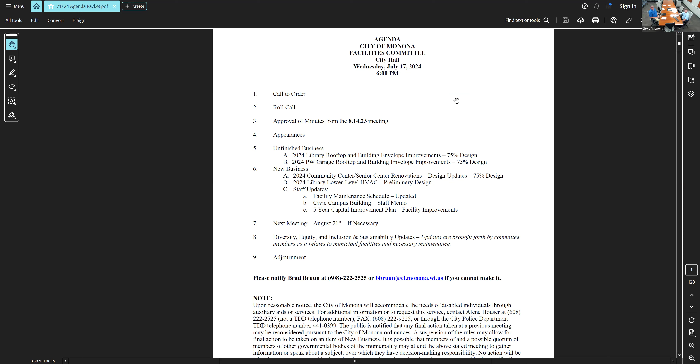And then is there any additions, deletions, or corrections that anybody noted? Nope. All right, hearing none, all those in favor say aye. Aye. Opposed? All right, minutes have been approved. Brad, is there anybody in the room that's for appearances? Not tonight. All right, and do you see anybody online? No, we do not have anybody waiting in the waiting room or otherwise. Perfect.

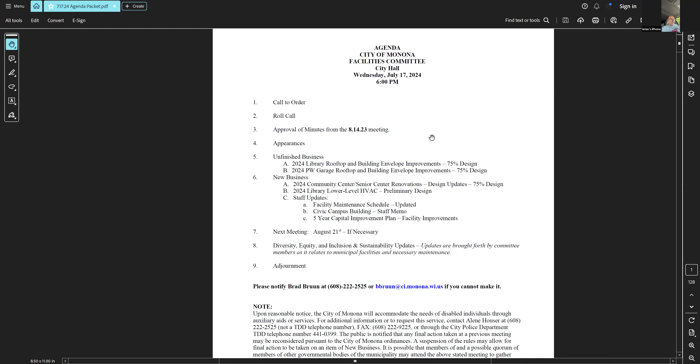That section can be closed, then we can go on to 5A, which is unfinished business. This is regarding the 2024 library rooftop and building envelope improvements, 75% design. And Brad, if you want to just kick us off.

So we'll start with the estimated costs. Can you guys see the screen that I'm sharing? Yes, okay, all right. The Public Works Garage is listed first. Not a cheap project, but it's a fairly large facility if you guys are familiar with that garage. And there's a fairly good amount of damage to things like siding, gutters, etc., especially the insulation.

Adam, do you anticipate us having to remove a fairly significant portion of the insulation on this project? So what we figured in with this cost is just kind of spot replacement of the insulation on the other side of the current roof deck. Unless something has changed, because it's been a while since I've been there, that a lot more has been compromised, then that was our intention moving forward, is to continue with that spot replacement. I mean, it's basically going off of my visual assessments when you and I walked around there.

Probably a year and a half, two years ago, yeah, almost two. So I haven't seen any other damage per se.

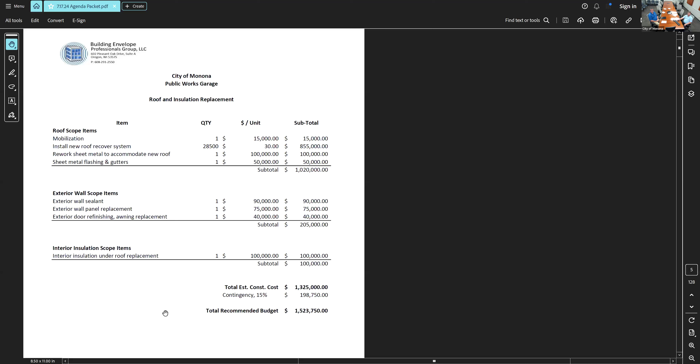Any questions on the cost estimation here? Pretty typical contingency, 15%. I guess my question would be, what did you figure for a percentage of insulation replacement? You're calling for spot replacement, but is there anything implied or written?

So that actual quantity is not in the documents yet, but will be. Going off of visual observations, I would say it was roughly 10 to 15%, somewhere in that neighborhood, of the total amount, whether it was on the underside of the roof or wall insulation.

That's a good point though, Brendan. We should probably list the estimation of the amount in the project manual. Yeah, I think it just covers both sides.

And Brad, where are we at with this estimated cost with what we had set aside? Well, we had in the original 5-year capital plan, I think like 800,000 for this rooftop. And then with price increases and delays in the project of a year or two, it's gone up, and the amount of damage that we've assessed is increased as well. So the scope increased slightly, and then obviously the price crept with inflation.

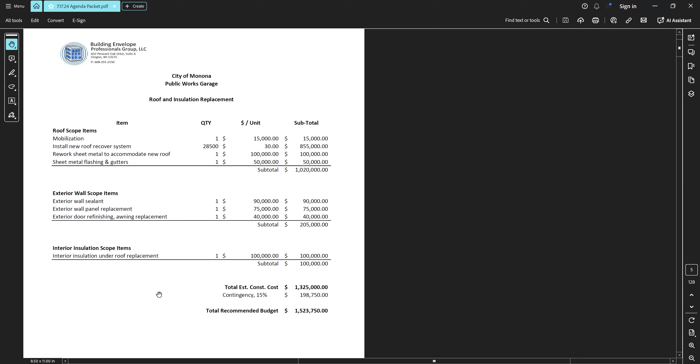Any other questions on the general scope of the project? No, thank you, sorry I interjected. That's fine, absolutely, that's what we're here for. Yeah, that's perfect. You want to move on to the library? Yeah.

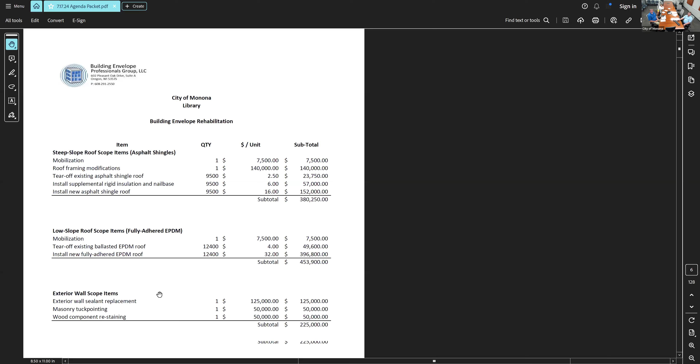All right, library estimated cost, 1.2. This particular rooftop is an interesting mix. The original facility is from 1970-ish, I think. It's a sloped roof with several angles, like 3 or 4 hexagons all put together. Then it tied into a 2001 addition.

That's a flat roof. Is it an adhered membrane? Oh, it's ballasted EPDM. We've been having issues with intermittent leaks, usually once or twice a year, something leaks into the facility, whether from the shingle portion or the flat roof portions.

The goal would be a complete replacement of the roofing materials on both sections, including repairs to different areas where we have a vertical face and the rooftop comes into the vertical face. So there's a skylight, there's all the curbs for the rooftop HVAC units, and where the sloped portion comes into the new addition.

All those areas need to be addressed, and then we'll address any issues with gutters and downspouts. There are a lot of air gaps in that facility - I can't remember what that ceiling tile material is called, tectum. It runs straight from the inside of the facility to the outside, and that's the soffit material outside. So there's a gap at the very top of the walls where the tectum comes through that needs to be sealed back up all the way around the original part of the building.

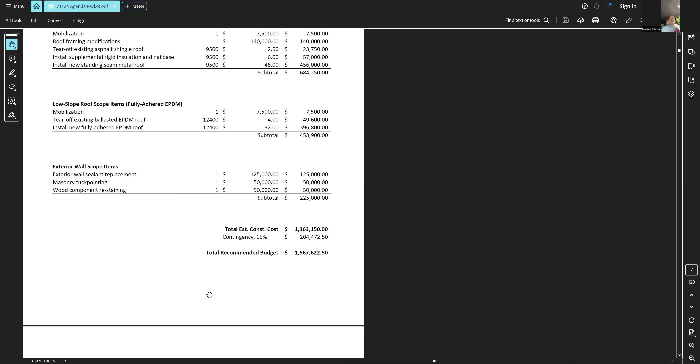Yeah, I would only add that we've been hesitant in the past to put something out to bid that we weren't somewhat committed to, knowing that firms go through a lot of hours and costs to respond to those bids, and we don't want to leave a bad taste in people's mouths so they don't come back for real projects. So that's the balancing act—sometimes we might add something in as an alternate bid, which could be rejected because it's a smaller side project. We'll have to see how things work out in this one.

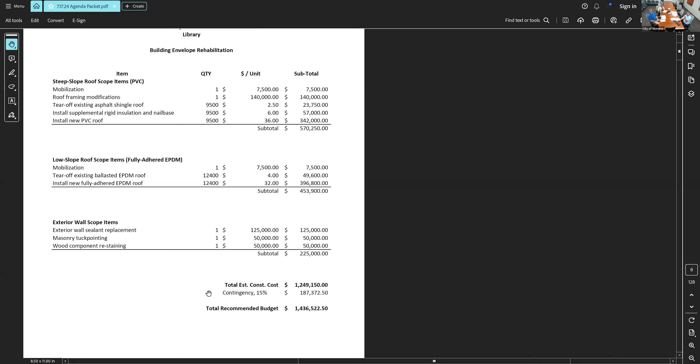So the difference in cost, I forgot that they were in here, I'm sorry. No worries, they're in the packet. I know it's a large packet, 128 pages.

I'm always available if you guys have time to look through any of this and have more questions. Reach out to me—I can get Adam on an email chain and we can go through everything with a fine-tooth comb if you want to.

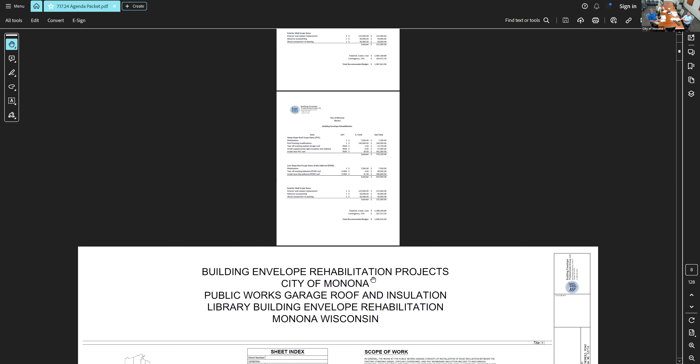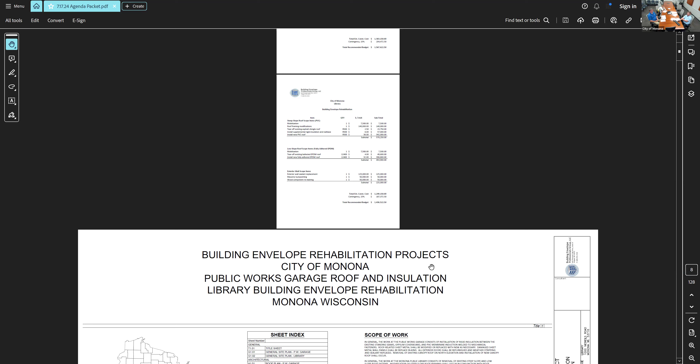Like I said, we're about 90% designed at this point, so we have time. The budget proposals go to the mayor the first week of August. So scope can't necessarily change, but we can definitely put in different items in the spec—language, CYA type language, assurances, limitations, milestones, things like that. So feel free to reach out to me.

I did send the spec manual today, so the spec sheets are in your email inbox. Let me know if you see anything in there you'd flag, like you should probably adjust this, or I'd suggest making some revisions here and there.

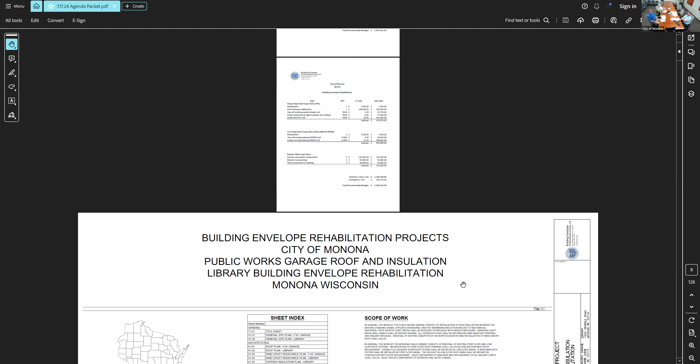Brad, that was that separate email with the 3 attachments, right? Yeah, that's correct, and that's specifically just for the garage roof and the library roof project—that's what we've been discussing here. Okay, perfect, thank you.

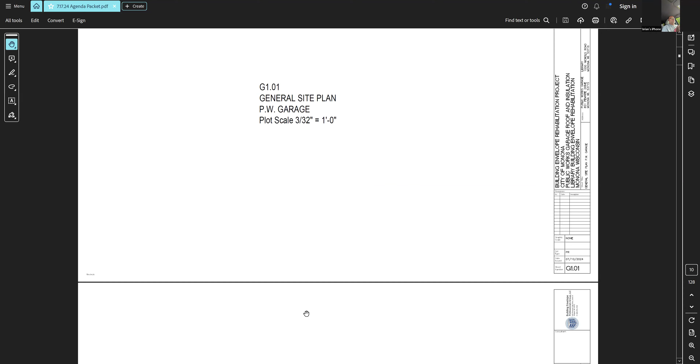I think we can move on to new business, and why don't you start us off with the community center, senior center renovations? Yep, so Adam, you're good to go up here.

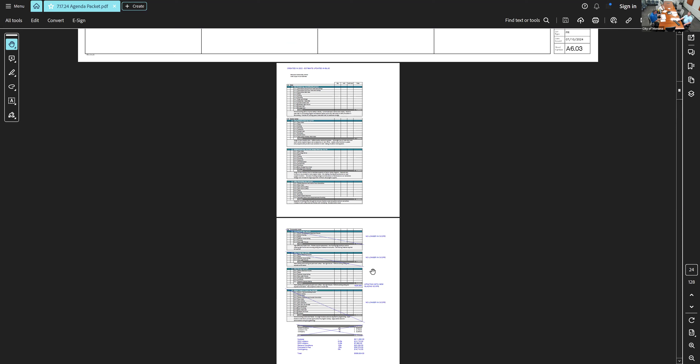Okay, thank you for coming. Yeah, thanks Adam, it was great to have you at the meeting. Yes, thank you, and we'll talk. Thank you very much. Yeah, you too.

All right, so this might look familiar. This was on our agenda in August of last year. The way we structured the bid request last year was to put in like 9 alternates prioritized from A to whatever it was, like H or I. And it was bid out late, and I just have a feeling that contractors looked at it and said, I don't understand, why would I put the effort forward to do this if the only part of the bid that you're going to accept is like the main bid, bid A.

So nobody bid on the project. I wasn't surprised with how late it was put out. Now we're looking at it again, and it is very late in the year again. So I don't necessarily have high hopes for this, but the scope is slightly different.

The idea here is to improve safety, accessibility, and functionality for the actual staff. Our senior center director is in an office that would be about the same size as most people's walk-in closets or smaller. It doesn't have HVAC controls—I don't even think it really has air conditioning in there. It's just a bad situation. The same goes for most of the rest of the facility, especially in the senior center, which is used on a daily basis.

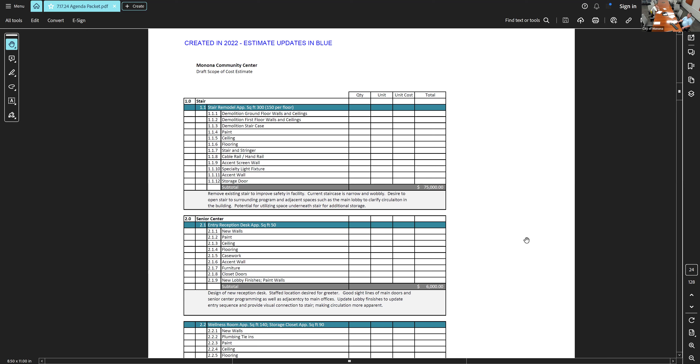So improving that, and creating a wellness room, which is heavily used even though we don't have one right now. It's one of the programs in high demand all the time for seniors. So creating a room with plumbing, to make it a more sanitary condition where you can wash feet, rinse things out, wash your hands, make it more welcoming and relaxing. It's meant to be a spot where you go to get healed and treated. So that's the 2.2 portion.

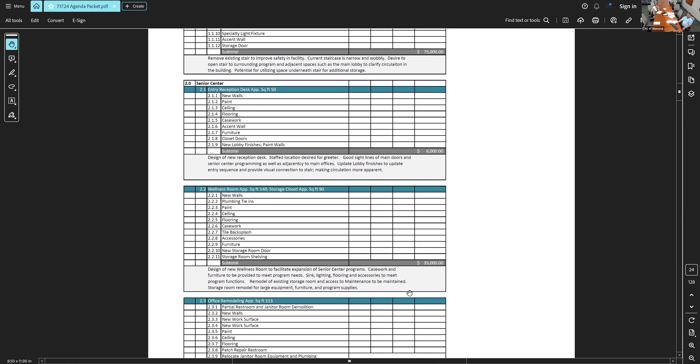And then the office remodels, and these are the items they've removed from the previous plan. The main hall - I'm not sure how much of this is actually going to be in the final bid, because they did just address it with a facelift. Basically, they painted the main hall and did some things, so we'll see how much of this is in there in the final bid.

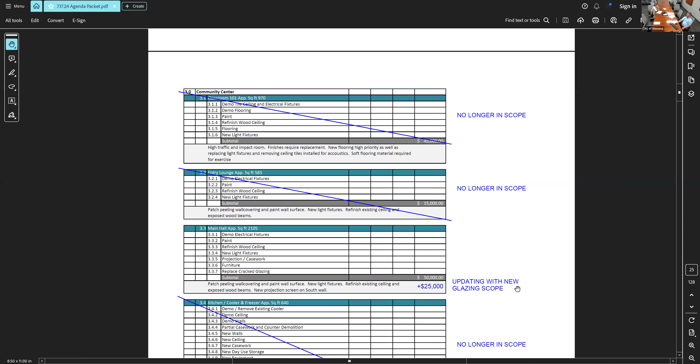But there are some major issues in that room, especially with the wood paneling, and the light fixtures are 300 or 400 watt metal halide fixtures - at least half of them are, and half are LED conversions, but they're these big glass bowls caked in bugs and dust. So it's not a welcoming room, and it's where they have their main events. They used to rent it out for weddings and church and stuff like that, so that needs to be addressed.

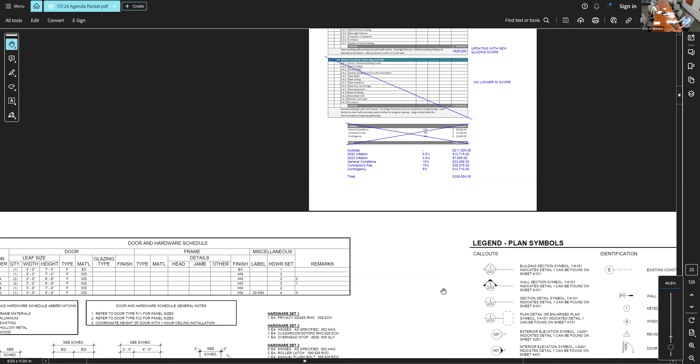Estimated total is right here. The budget is 300,000, so we'll see what we're looking at with bids. The plan set continues on after that. I don't think there's a bid manual in this packet - I don't believe he sent me that, so you just have to go off the notes and the plans, but you can get a general sense of exactly what they are projecting to do with the facility with these renovations.

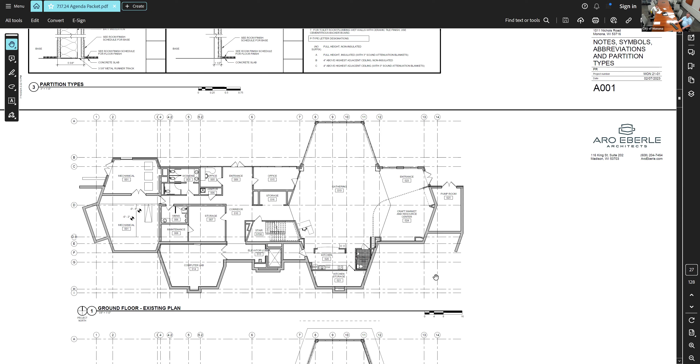All right, thanks Brad. I might have cut out there for a minute - my phone overheated and turned off. So now I have the air conditioner on, hopefully that resolves the issue.

Brad, were all of these drawings in the packet, and these revisions - or did I miss when you mentioned that? Yeah, the drawings are in the packet. This is the packet that I have open, we're just scrolling through it - the one that was attached to the meeting, and the one that I sent out again today, just as a reminder.

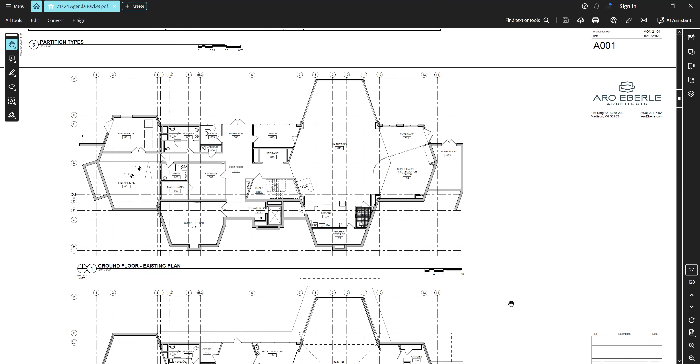Okay, and it looks like it's the same project, just a little bit reduced scope, right? Yeah, that's correct - we're not doing the lounges and the kitchens anymore because we don't have the kids in the facility anymore for the after-school programs. Okay, so we really don't need to touch that stuff at this point. Okay, that makes sense to me.

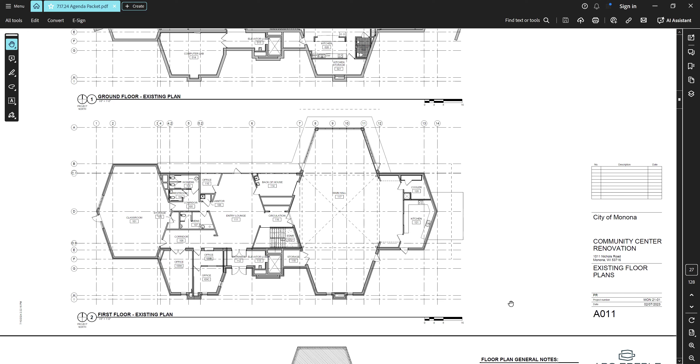Are there questions that others have? At the end of the drawing it does look like there is the bid package with the advertisement to bid and all that. Oh, there is, okay. Good, so there is some HVAC items, obviously, and then there's going to be a significant amount of electrical.

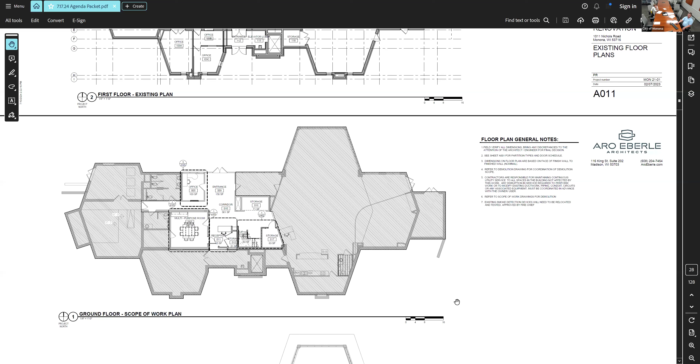Once they start touching the rooms, they have to update to meet electrical code. The spacing with outlets and things like that isn't even close to meeting code as it is. So some of these things add up very quickly, especially on electrical, plumbing, and HVAC, when you're talking about reframing or tearing out floors. Aesthetic stuff isn't as big of an issue, but there's low voltage work that has to happen with this project. So the scope, even though it's a small renovation, it still adds up very quickly.

This building is from 1968, built mostly as though it was a three-season facility. They built the west side of the building with these prefab panels, which have windows in them, and the panels are only about 2 inches thick, which is the amount of insulation in those panels. So what happens in the wintertime is they ice up on the inside with condensation, directly over the top of a lot of the floor registers. Then you get melting and freezing, melting and freezing, and it's just an absolute mess, which isn't part of this project.

We'll talk about that when I show you the facility maintenance schedule I've tried to put together, which will be presented to the mayor. It's probably going to be overwhelming for most of the alders and the mayor as well, so there's a lot that needs to be done, but a lot has been pushed or neglected. We didn't have somebody necessarily in my position over the years trying to corral everything and funnel it so it gets organized and somebody's eyes are on it all the time. Facilities in most municipalities just don't get prioritized if they're not heavily used by the public or aren't a landmark, so to speak.

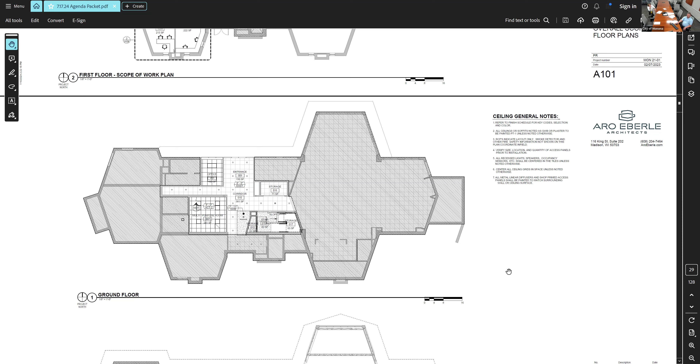Are there any other questions?

And you said some of those items might be taken out because they were already taken on internally. So maybe, you know, that main vestibule, when you come in, the entry space that had a line item like 15K, it'd be really nice to upgrade the lighting in there too and try to have a similar feel as you enter the building for your first impression and to get your bearings. So if there's any way to squeeze some of that into the bid, I think that would be good.

I believe that main lobby, when you walk into the community center on the upper level, those lights are the same as in the event room, and the idea was to change everything out to whatever style they choose. I believe they're doing something along the lines of a hanging light, fully enclosed, like a bar or a circle, but with no gaps, just a panel or glass panel. So all LED, low voltage. Yeah, because making an inviting space and making it function better.

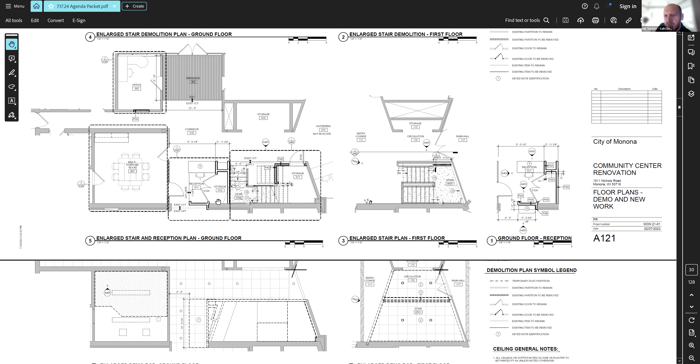And then while you're on that plan, the lower level has a reception desk when you come down the stairs, which has no sight line as you come down. I see it's lined up with that entry to the north that faces the pool. Is that the main entry to the senior center now? Yes. I've never gone in that entry. Yep, so this is the main entrance for the senior center right here. It comes in from that parking lot along the side, and the pool is out here. This is the proposed expansion of that office space, which is not even a third of that right now.

Moving the door, there's a register right here on the wall.

This is like a janitorial closet that doesn't get used very much, so that's what they're expanding into. There's a bunch of HVAC that needs to move into the drop ceiling here. And then this room is currently...

It used to be like the maintenance room for the facility. This is a closet that goes back in here, and it was just being used as storage, general storage. The idea is to make this into something that's more like a meeting room.

They could list it as a multi-purpose room, but something that they can use, that they can put people in so that if they have another event in adjoining rooms or down the hall, it doesn't interrupt them. So if something is noisy or these guys need a quieter space, they can do that.

And then, yeah, the stairwell will be down there, reconstructed and improved with added storage underneath it. And so when you come down, you'd come out and there's this kiosk welcome desk around the corner.

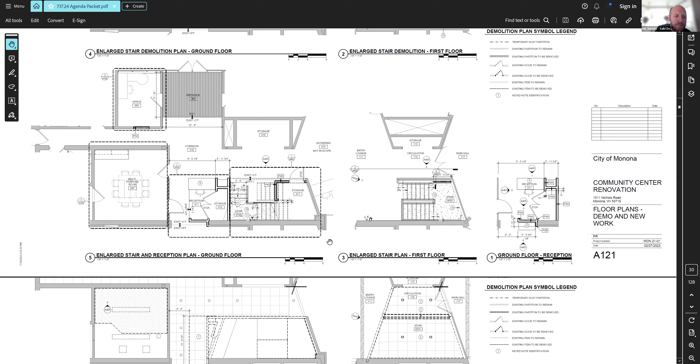Just for that main hall, you mentioned that it's not currently being rented out. Is the plan in the future to be able to rent that out? Honestly, I want to say that's pretty dependent on the referendum.

That is going through—we seriously have a major staffing issue when it comes to maintenance. The only way that we would be able to do it is if the costs of renting it paid for the cleaning and maintenance of the room.

And that's been addressed through the Parks Department, and they've discussed it pretty at length. So if they ever did open it back up, that's what we'd have to do.

The other issue is the security system with the locking mechanisms on all the doors. It doesn't work very well in this facility. We've always had issues with it.

And so to monitor it, to make sure that it closes on a timer and stuff like that for events, so that people aren't in the facility passed out all night or something, like at a wedding—which has happened—that's also an issue. So they need to figure that part out.

Right now it's just to uplift it so that the city can actually use it. We used to have all of our staff appreciation lunches and stuff like that in that space. So the goal would be to use it again, especially for public information meetings.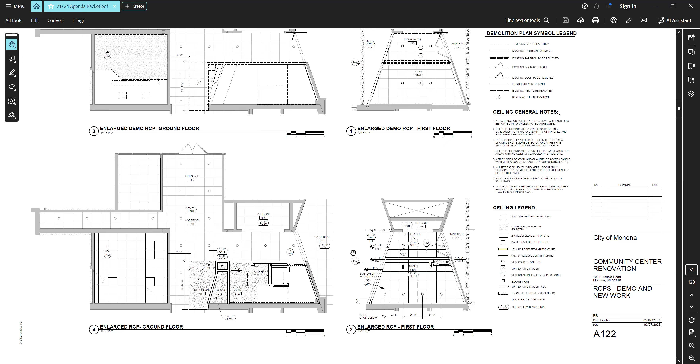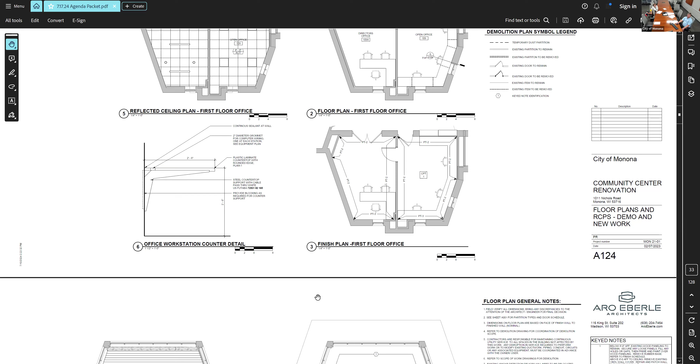Okay, most of the rest of this is your typical plan sheets, flooring, ceiling tiles, director's office, office layout. So again, if you see anything in here that looks odd or needs to be added, just let me know and I can send the feedback to the architect, our parks director, and our senior center director.

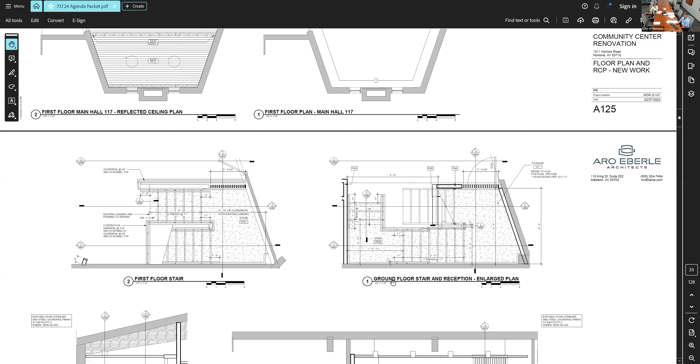So this is what the new stairwell will essentially look like, with the reception next to it on the bottom. So it looks like maybe they're actually moving where you come out of the stairwell, to the backside, which would be interesting.

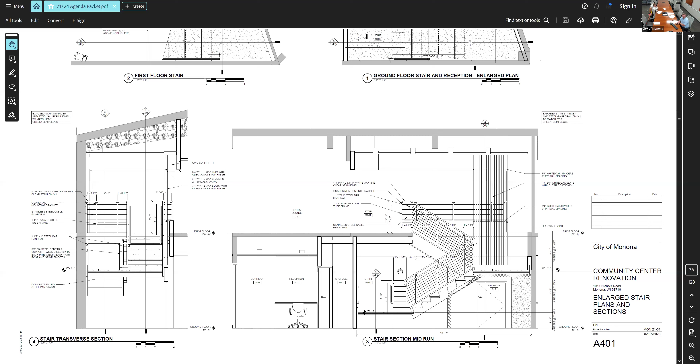I'll have to look at these closer and get back to you guys, or you might be able to see it if you look a little closer at these plan sets. Yeah, I think the next point, there might be some sightline issues there, but I think it could probably be solved with some signage. When you're coming from upstairs, I think you're just gonna be looking at a wall and not know whether to turn right or left. Coming from the west side of the building, I think it's pretty apparent because the reception's right in front of you, but... Right, yep, yeah, I agree.

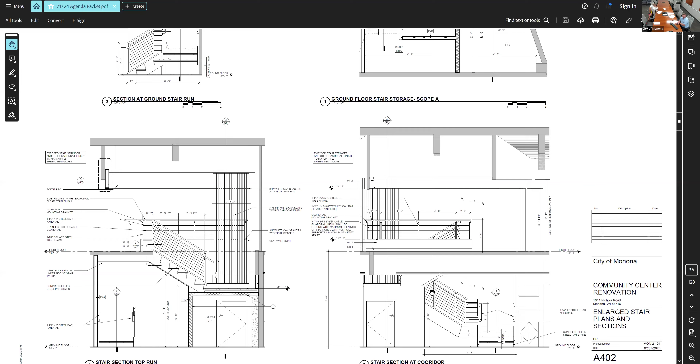I think one of the issues we have in this stairwell area is there's load bearing walls that they didn't want to touch, so to rearrange how it's laid out is kind of tough. I think they are opening it all up though, so there's no longer a door when you come down the stairs, which would be ideal, because it kind of feels like when you're coming down the stairs, you're in a tunnel.

Anyway, I can keep moving here, I'll just page down. And this is the spec sheets, the project manual. Again, the goal would be to bid this probably in a month or two, but we'll have to see what develops with it.

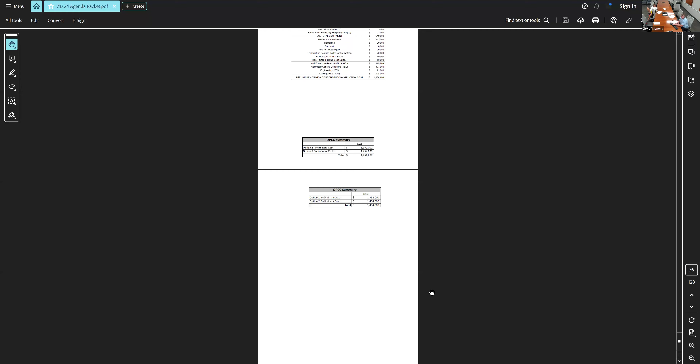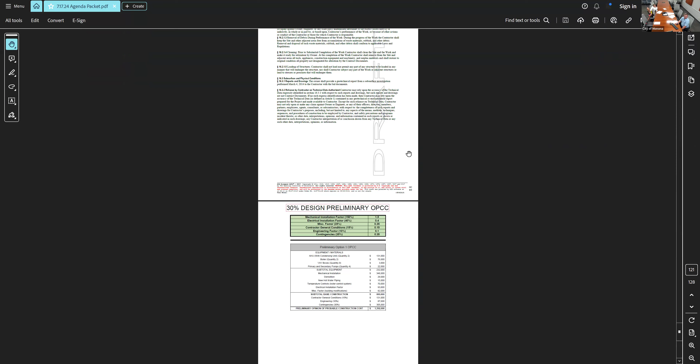Yeah Brad, I think you can keep going on to the lower level HVAC. All right, so, zoom in, here we go. So this is about 30% design as it lists up here. The goal would be final design in 2025, construction or bidding and construction in 2026.

The HVAC system in the lower level is a split of 2 air handlers, 1 boiler, and a split system ACCU on the exterior of the building. The control system is a mixture of, what do you call it, MSTP old Delta controls, which are no longer... I mean you can't even program them anymore. You have to have a special set of software on like an HP from 2000 to even interact with the controllers.

The goal would be to gut basically everything except most of the ductwork. There are heating coils that were added in 2001 when they did the addition to the building to try and improve control, the comfort levels in individual spaces. The goal with this project would be to remove those, reuse the piping and the ductwork, and put in VAV units, and then put in 2 air handlers and 2 boilers to run a redundant system, with all new controls, all new space sensors.

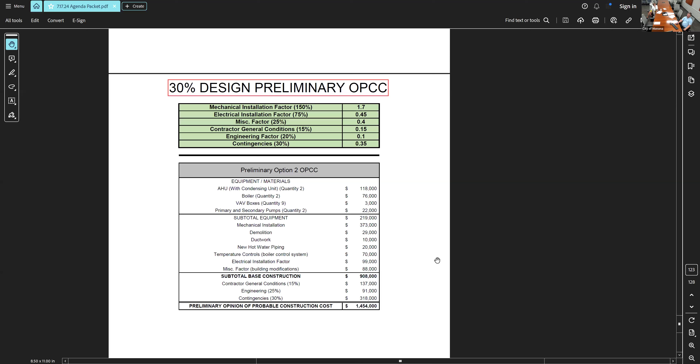The other option is to run all new ductwork for a second unit - essentially like an RTU outside on the exterior. After talking with our main contractor that does preventative maintenance on our HVAC systems, they said we're probably really not going to like option 2. It's going to be a significant project to try and get the roof or ceiling dropped in the forum room - it's going to look awkward, and we'd have to move all of the lighting. All your maintenance then is on the exterior, but there's still another unit on the interior, so it's kind of an issue with maintenance. It's just not the best option.

So we're leaning toward option 1 on this, which is cheaper as well. And then we can go down here, I can show you kind of the idea.

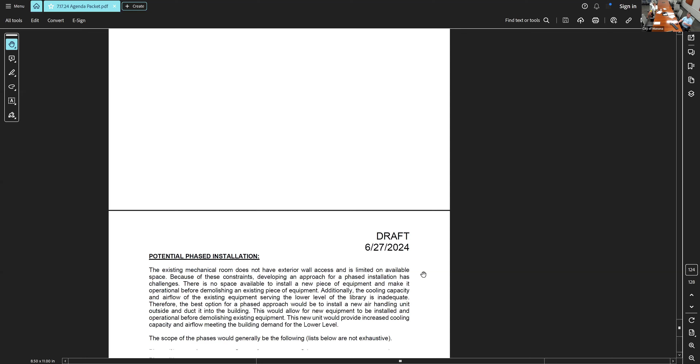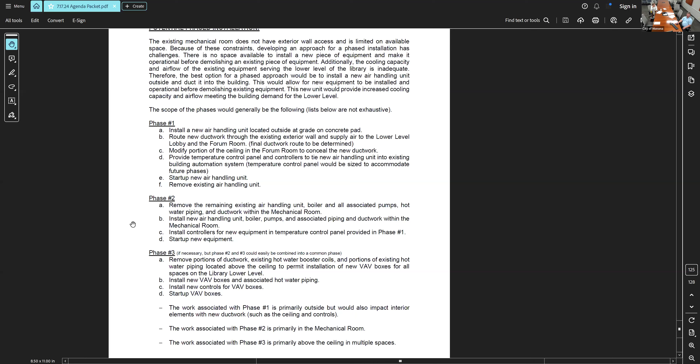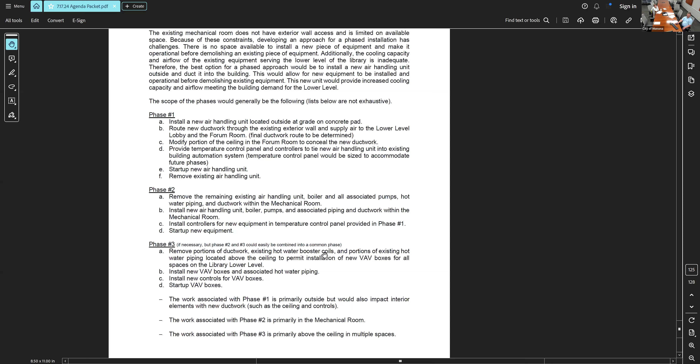We are looking at potentially phasing this project, which is laid out here. I've talked with our engineer about it and he says it would probably be better to do it all in one project, but with our budget constraints the way they are, we'll at least have to figure out how we're going to phase it if needed. The idea would be to install all the new air handling units, and set up the control system and the boiler. Then come back and set up the control system, and then come back and do all the water piping, ductwork, boilers, etc. And then come back and do the VAV boxes later, after that's all done. We'll see how budget friendly the council is going to be for this project, but we've got some time to think about this - obviously this is just preliminary design at this point.

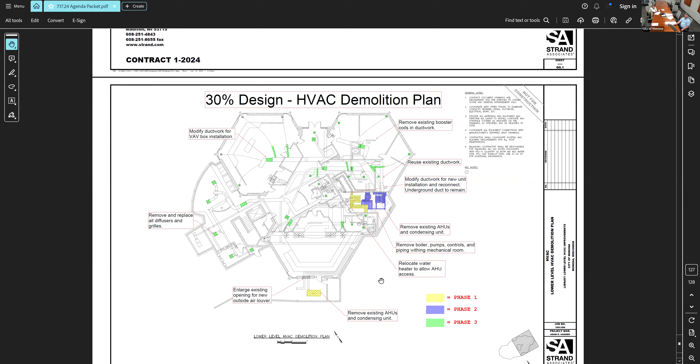But as you can see, there's a lot of demolition on this. We also have some ventilation issues that we've come across that are likely to get added into this scope of work, when they put the large open stairwell in that goes from the upper to the lower level.

Everything got opened up a little bit more. And what ends up happening is when we economize in the facility, which is when we use fresh air to cool and condition spaces - obviously the most efficient way to do it - which doesn't happen too often in Wisconsin, but when it does, we overpressurize the facility because we don't have mechanical exhaust. So what's supposed to happen is excess air pushes into the air return and goes out of the unit. But the doors on the unit are so heavy that it just keeps recycling, and we're putting more and more air pressure into the building. Then all of our doors kick open and stay open, and they're hard to open from the inside or otherwise.

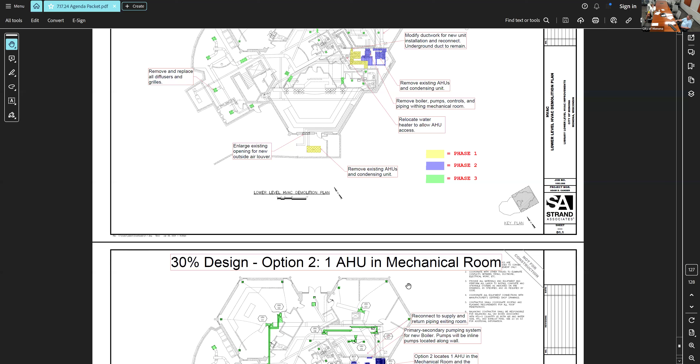It's worse in the lower level because we're not pumping enough air down there. Like I said, we're at about 60% of our air capacity. The upper level is feeding it air through the stairwell, and it's pushing those foyer doors open right here, where most people come in from the parking lot - or over here, I should say.

So yeah, it's a bear, this project. But it absolutely needs to be done. This system is falling apart. I don't have it listed in here, but I do plan to create a summary of maintenance over the last couple of years.

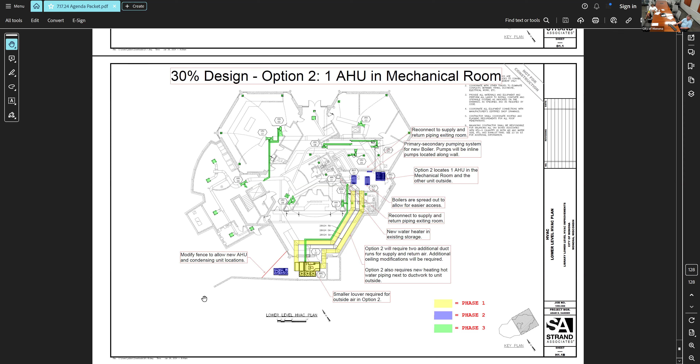This year alone, the library's maintenance budget is already at 115% of its total. The community center's maintenance budget is at 100%. City Hall is at 50%, only because we beefed up our budget over the years. And we've used all of the capital maintenance budget already, which is for emergency capital investments for facility maintenance - like new pumps, new air conditioning units, new lighting, stuff that's an asset of the building that can be claimed as a long-term asset. We use the capital account for that.

It's just one of those things where you push even small maintenance projects - stuff that's 30, 40, 50, 75 grand - and you push it and don't do it, and things fall apart. And when they fall apart, Murphy's Law, they tend to fall apart all at the same time, or at the worst time imaginable. So that's kind of what's happening right now in all of our facilities, because really not much is new in our facilities.

So you can see option 2 shows the exterior air handler and how much ductwork goes into that option. If you've ever been in the forum room, it's like a stage - this area here all the way around is stairs, like a riser for viewing the stage right here, for an audience. To drop the ceiling in all of this, like a third of the room, significantly - we're talking 4 to 5 feet - is going to make the entire room look goofy, because right now the ceiling is all the same height and it's for acoustic purposes. So this would definitely have a fairly significant impact on that space.